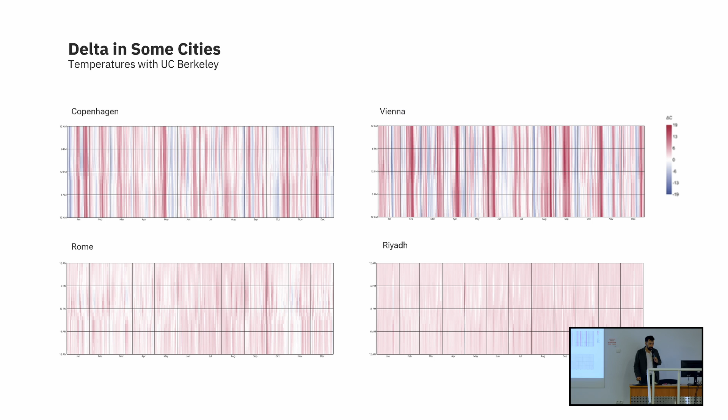When we begin to look at climate change for different cities, climate change is very differential in the sense that certain locations like Riyadh have about 6 degrees more flattened all over the year, whereas certain cities are characterized by frequent changes and frequent extremes. We are losing, in a way, the average condition that characterized these days.

These are differential. Each place is going to have extreme high changes, for instance in Riyadh, especially during nighttime, whereas in Rome, major changes happen in the central times of the day. So it's very important that we are able to understand how things are differentiating.

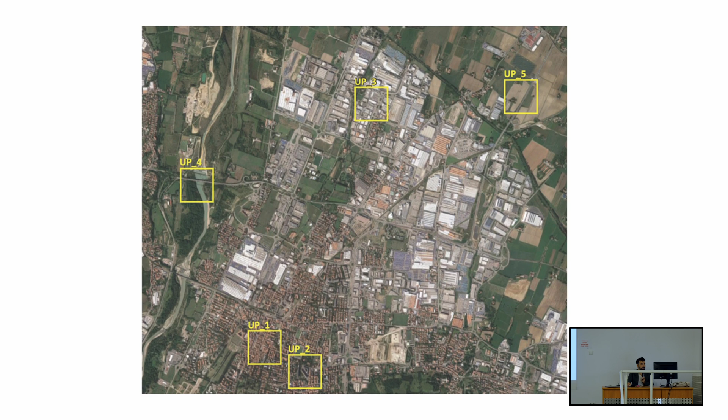I'll show a first example, which is the city of Maranello, where Ferrari is, just to understand what can be the local effect of climate change. This is a collaboration with the office of Mario Cucinella, with which I collaborate. So we did models to understand within the center of the city what will be the real feel in terms of temperature in 2050.

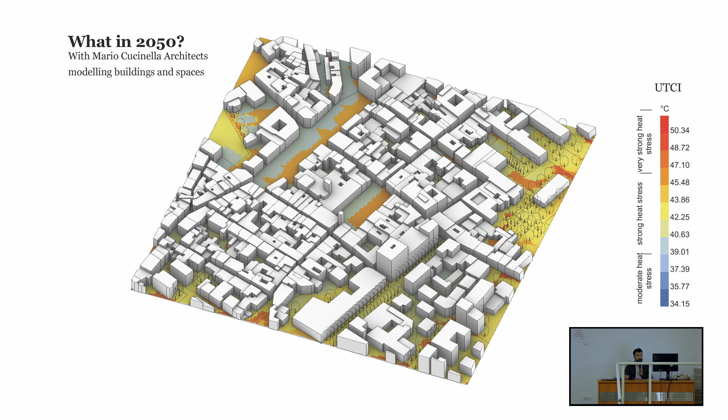We can see that in certain parts of the city, like this longer plaza, we have experienced temperatures of about 45 degrees. And also this is affecting...

...the energy consumption of buildings. And each building will have a higher temperature within the interior of a certain number of degrees. And we can see that certain buildings have almost no changes in their temperature, whereas others have. Let's just keep this in mind.

When we go to the natural site, very interestingly, there are certain features that actually stay at stable temperature, like you would obviously think.

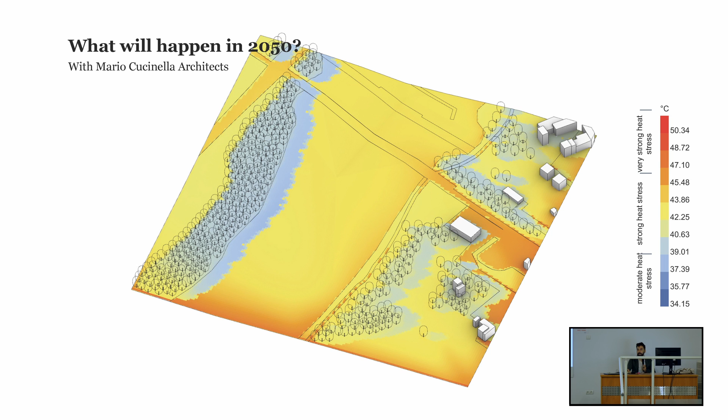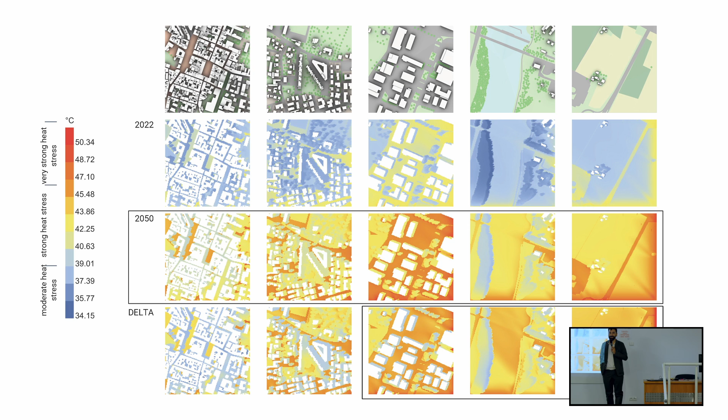And this is an industrial site. I wanted to pay attention to this: are you aware of the topic of urban heat island? Have you heard of cities warming up? Yes, do you believe in urban heat island?

Okay, I don't. And I will explain why. So this is the historical center, and these are the surroundings. These are the changes in temperature.

You can see lighter colors here, lower temperature. And here you can see higher temperature in the agricultural site and in the natural site, with forests and rivers and so on. Higher temperatures are experienced in the future in the surroundings of the city than in the center. This is a bit of new information for you, I guess.

This is due to the fact that when there is vegetation, actual vegetation is not capable of adapting to future temperature. So trees, according to this model, are each modeled according to their resistance to radiation and temperature. What we have is that agricultural crops and paths, as well as natural systems, are actually getting even warmer than the city center.

But anyway, a certain fabric, a certain distance between the buildings, a certain mass, especially during the day, is able to reduce temperature. What is happening is that a tree dries or dies, leading to higher temperature. Same happens for grass: when it changes its fibers and becomes dry, it actually accumulates heat rather than reflecting it. So all these factors are quite important.

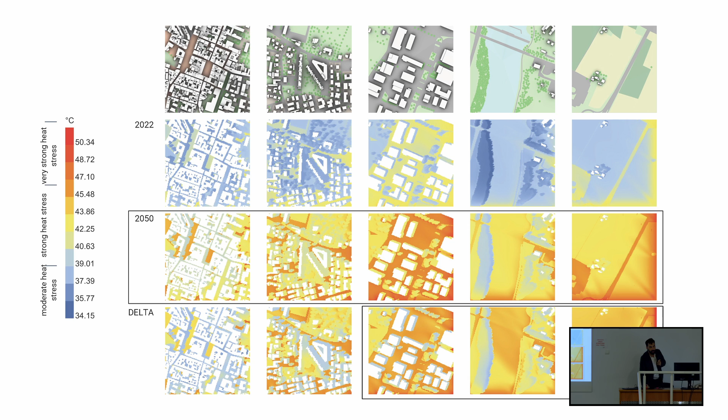Okay, so what can we do? The implications are quite high. So we use these models, and then we did some parametric correlation that helps us see how, over this timeline, hydraulic flow is highly reducing with this temperature trend.

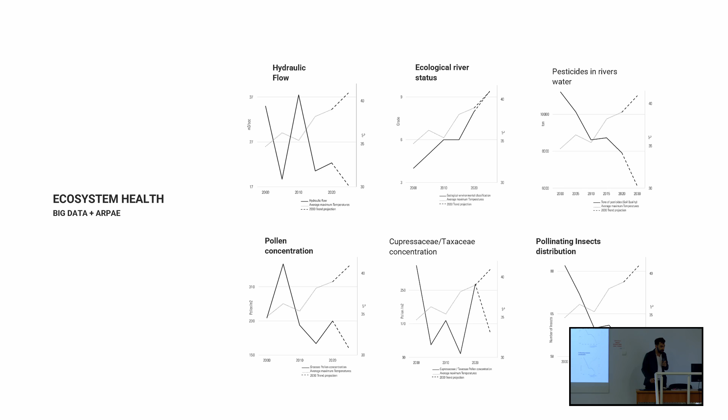Ecological river status is decaying, as well as there being a big decay in the number of pollen concentrations. And there is a desynchronization between bees, butterflies, and other pollinators and the trees, an alteration of timing that is actually catastrophic for the natural ecosystem.

But also, when temperature increases, pollutants in the air, despite the electrification of vehicles, are catalyzed. So for each degree of higher temperature, the effect of particles of different sizes increases a lot.

And obviously, because of climate change, there is more radiation from the sun, and this impacts skin cancer. There is a huge number of cases across all of Europe and also in this district.

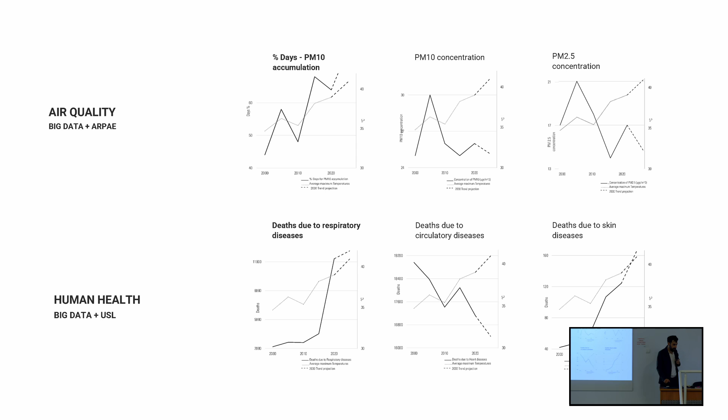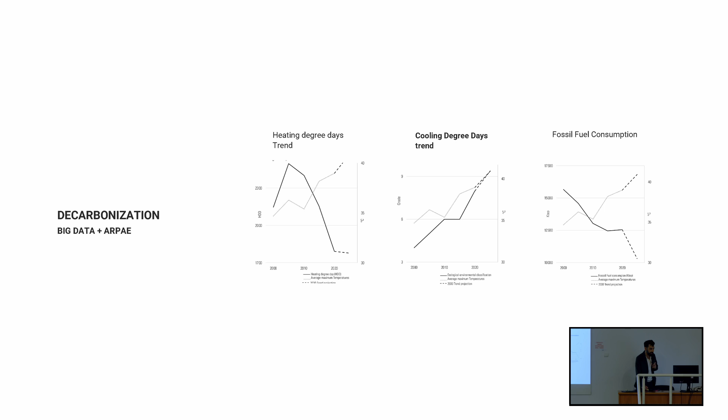So even a few degrees means a lot, and obviously there are consequences for buildings as most of the energy costs are shifting from winter to summer. So these are quite big numbers to take into consideration.

Up to now we have lived by the paradigm of sustainable design, which says don't do any action that compromises the environment or health. It's a law; sustainability is a law of conservation of the status quo we already have.

The question is this: okay, considering the degeneration we've been speaking about, is it enough to be sustainable? Sustainability means actually to conserve the current situation, or do we need to do something to regenerate the context? And this is the quality of planetary health, or local health, we can say.

So as the quality of ecology and health decays, probably we cannot afford any longer to be just sustainable and have minimum impact or no impact. We have to have a positive impact on the context.

And here comes the definition of regenerative design, which is about having a plus in several categories. I will tell you a bit more about that.

So probably we can use many of the available systems. What we've been using the most in Copenhagen is the planetary boundaries. It is actually like a cake, where each slice refers to one of the elements of health for the environment. Some refer to water, some to air, some to ground, some to species.

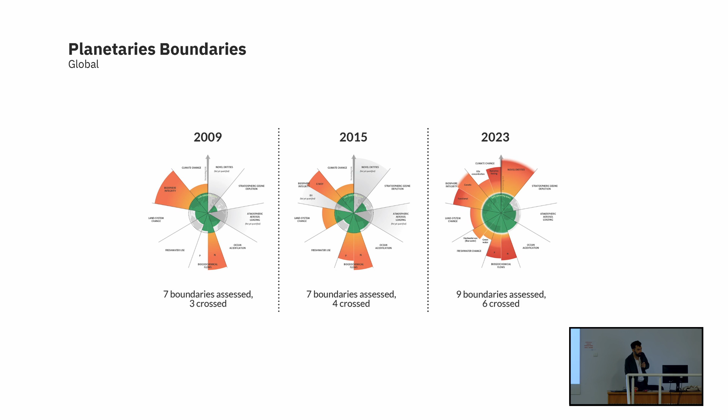In a very short time, most of these boundaries, which is the limit above which there is no possibility of reverse condition, have been exceeded. So the question is, what can we do as architects or planners for this?

When it comes to the first category of the planetary boundary, climate change, we can think of using the new temperature of the city as an opportunity. That will be one of the focuses of the lecture.

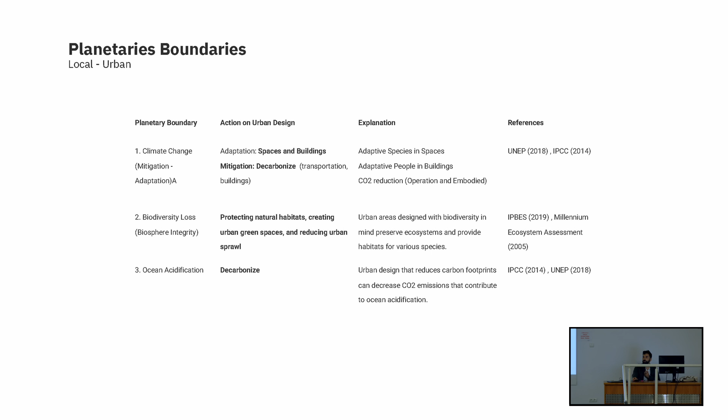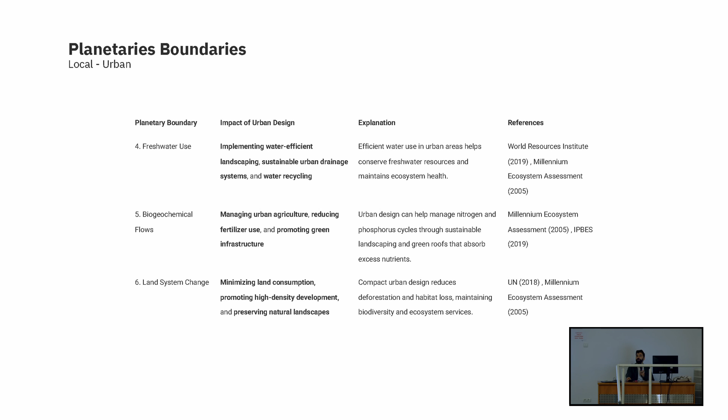This is quite straightforward. When it comes to fresh water, we have to think that the water that enters into the city has to go out with the same quality. I will probably leave you the lecture so you can go through some of this. But let me get back to one point.

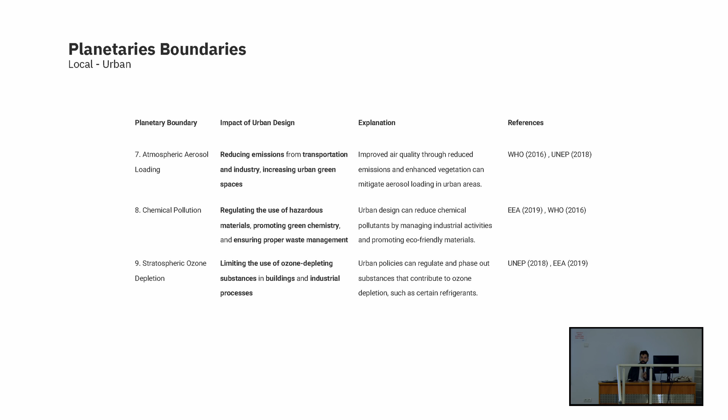When it comes to atmospheric aerosol, the different kinds of particles, we can probably try to understand what amount of vegetation we have to place into our context in order to absorb it.

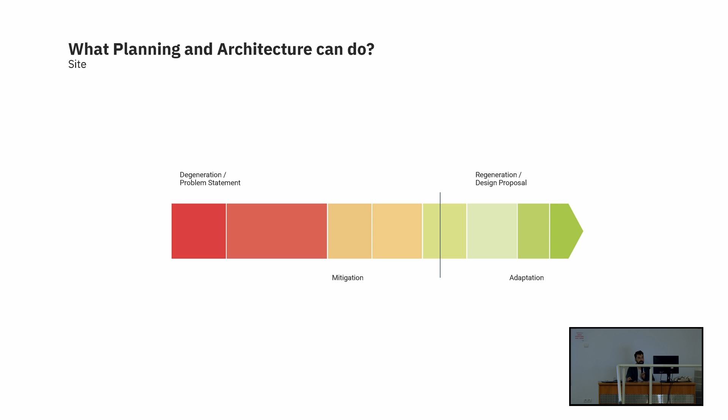So we said that we have to shift from a sustainable approach, which is about mitigating, to an active approach, which is about adapting. And here is the first project I'm going to show.

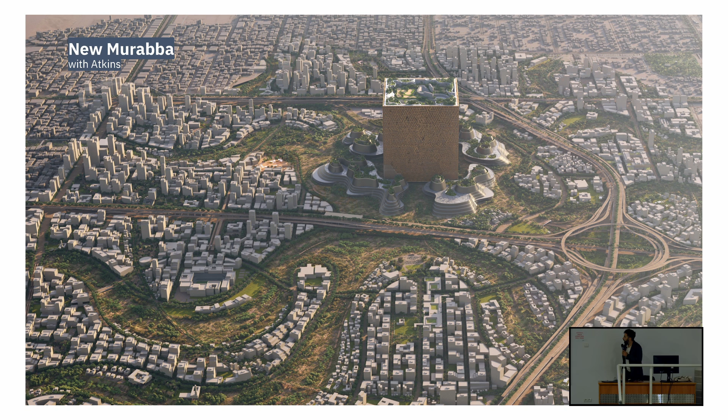This is actually one of the largest developments in the world happening now, in Riyadh. The idea is to create a new city, an extension of Riyadh, that compared to the other big project, the Neom, which everyone probably knows, tries to root much more into the design of ecological lines that are into the context.

So it all starts around dry rivers, called wadis in the Arabic context. The whole idea is to start, before building all the structures in this 20 square kilometer site, by creating the biodiversity system first, and then begin to construct the different neighborhoods.

This is quite controversial. As you can see, this is a skyscraper to give you the height - this is half kilometer by half kilometer by half kilometer. So it's going to be the largest building in the world, which is interesting because it casts a big shadow, which in a way keeps activating the context and creating an area which is protected.

But what are the challenges? Around here there are linear elements that each have a certain ecology within them, a certain protection, and this is supposed to be an area where all the streams coming from the different river banks and corridors turn around and create some turbulence.

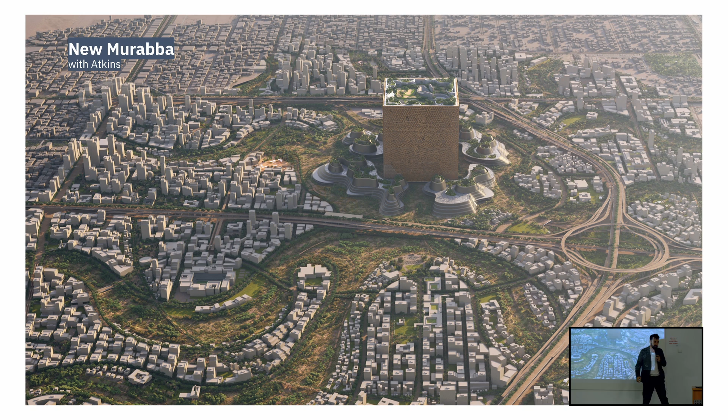This has to be supported with some simulation, and obviously you can understand how long it takes to do a thermodynamic simulation for 20 square kilometers with the tools you use in your course, like the Ladybug tools and so on.

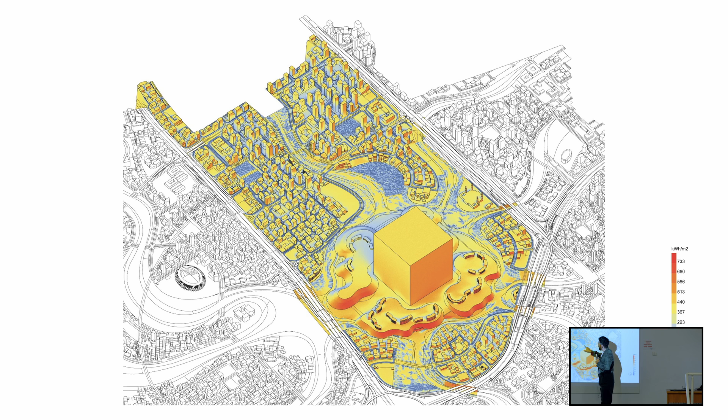This is actually a radiation map where we can see how it's possible to create pockets of different colors. For now, let's simplify the language - intentionally, around the wadis, there is an idea to create a zone of different temperature.

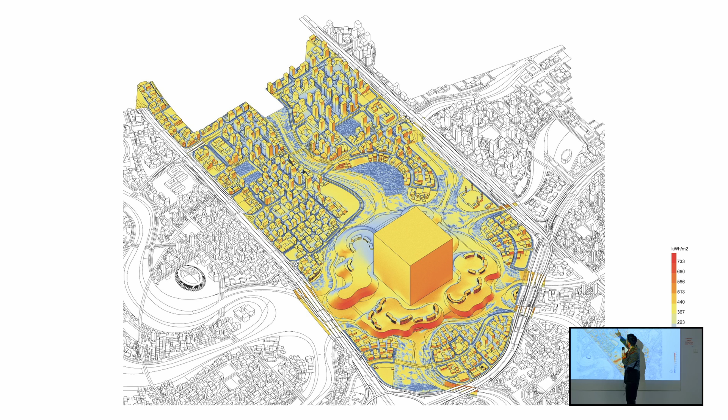So there is a certain flow and inner movement within the site, and there are other parts that are shaded. The idea is not to create a reduction of radiation all over the site, but to create areas where a heat flow will be generated in such a way.

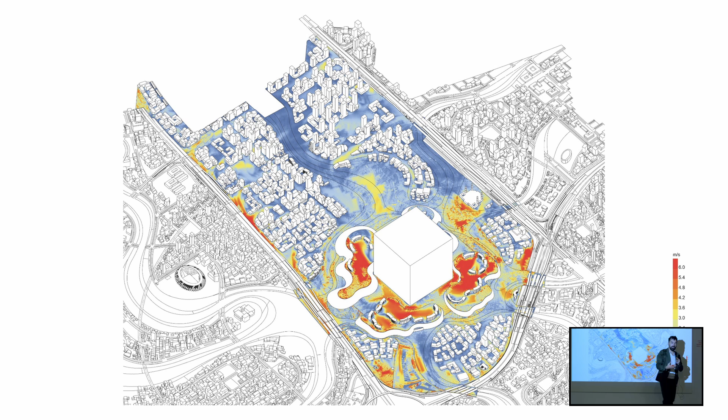So whereas this part seems to work, now we are working on all of these blocks, because despite the northern wind, at night it comes in this direction, and there is still not enough turbulence or movement. So there is actually work on cutting and carving some of these shapes that are then given to the various archistars for development. But it's several iterations where the climate has to be modeled for a large site.

But the idea is to play with reflective material, with misting systems, with a series of technologies to see what works and what doesn't work. It's a bit complicated because natural ventilation, for instance, doesn't work above 36 degrees.

Above 36 degrees, it's like pointing a hair dryer at yourself. So ventilation is not always a good feature. When air is higher than the temperature of the body, it's a problem. Misting systems are also problematic in certain conditions, as well as vegetation, which cannot sustain this type of temperature.

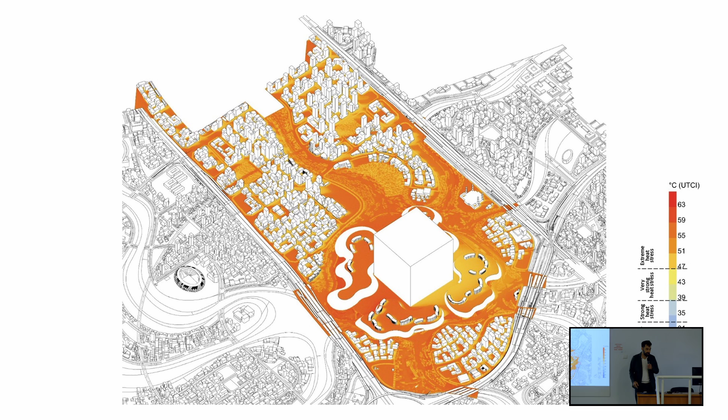So actually it's a very iterative process where you need a mix of several technologies to achieve a better situation, where probably even trees will need to be shaded themselves in order to survive within the context, and then the trees generate the comfort for people to stay. So we study the comfort of different species, trying to understand at what temperature and radiation they can survive.

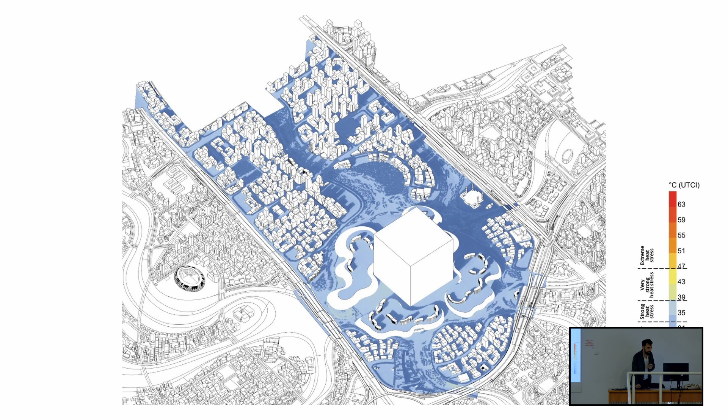This leads to several iterations over several months, where we have to design conditions primarily and surprisingly not for humans to stay, but for other species first. So it's a complete shift of paradigm where the first target, at least nominally, or at least in our work, is to create an environment for multiple types of species. The project is ongoing, so let's see where it gets.

This is for the city of Gothenburg. I will sit a little, just because I need to use the mouse more often, otherwise we'll stay until 10 o'clock.

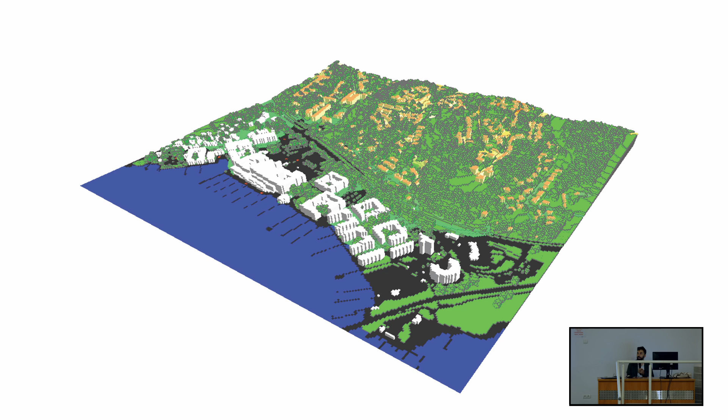Gothenburg is trying to expand, and there is high pressure to sacrifice some of the forests, especially in the suburbs. There's a new layer of buildings, and also several built in the 60s that are considered obsolete by the municipality, with higher density investment being considered. So the question we had is: what can we keep, and what can we get rid of?

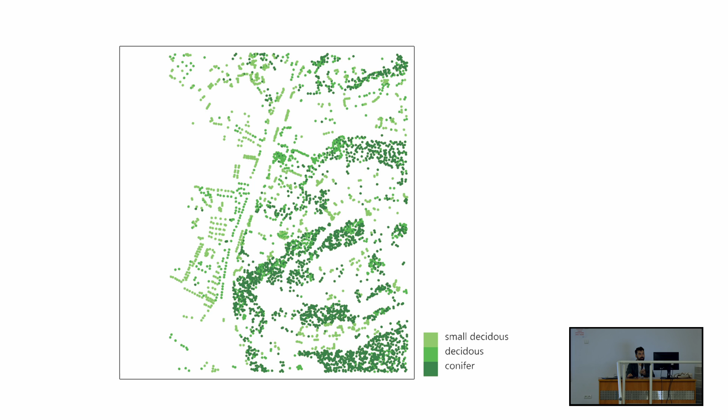So each type of tree, or at least the three primary families, were modeled, as well as the different building fabrics, shapes, and so on. This is the temperature at 2050 for the site, where we can see how certain areas get to 40 degrees up north, as well as certain buildings, at least during the day, reaching very high temperatures inside.

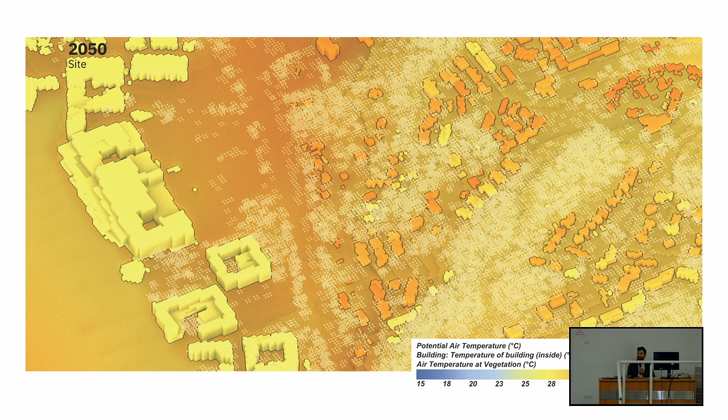Imagine a Swede living at 38 degrees, when already 26 degrees is quite a problem for someone from Scandinavia. So it's a big shift from 2018, when we recorded the data and calibrated the model, to what is projected for 2050.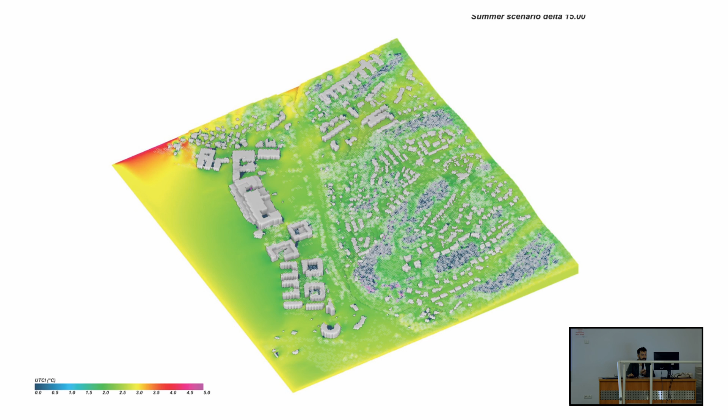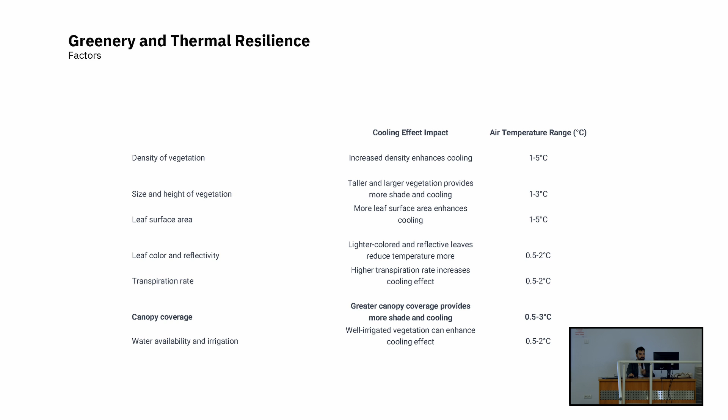And we could see a certain effect of lowering the temperature, both today and possibly into the future. You can consult this data later.

A building that is hyper-insulated, like the new offices they've built, has the same temperature day and night, with no mechanical system. It's so thick that there is no exchange with the outside.

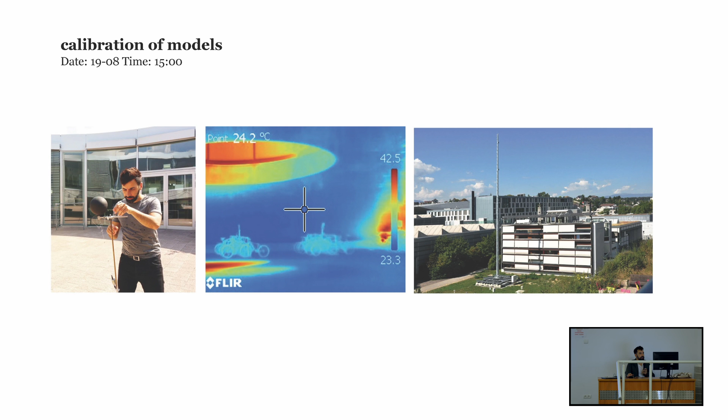Some other example—perhaps I'll skip this project, since it's a collaboration with Kengo Kuma's office. For some years I was at EPFL as a researcher, and we began to have communication with different architects to do a sort of post-occupancy evaluation of performance.

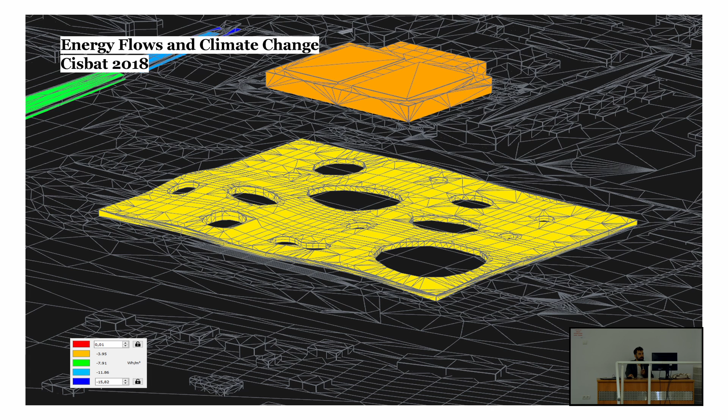These are the heat exchanges happening between the buildings and the context—these are energy flows. This was in construction back in the day, or in refinements we could call it. This was the Art and Science Museum at EPFL, and we did a thermal model of the full context, seeing which meshes or areas were going to have very high temperature surfaces. It's easy for a surface to get to 80 degrees in summer conditions, for instance.

We can see an interesting fact: this is the old campus of EPFL, where surface temperatures are much lower. Why? Because it actually has very poor insulation, and the cooling load—the cooling of the outside or the inside—also cools down the building surface. So there are interesting interactions between the interior and exterior that can be evaluated.

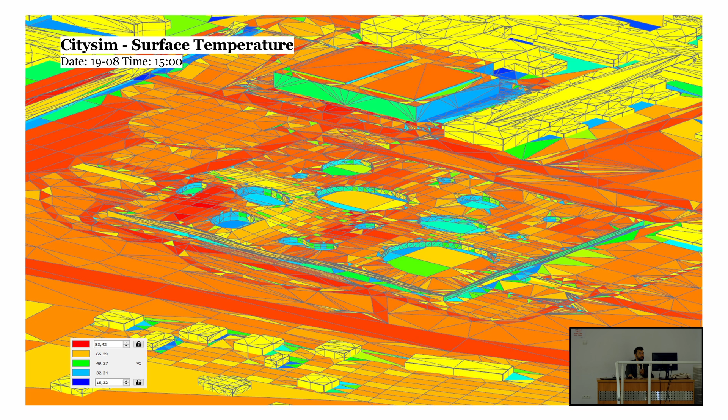Getting back on track, the overall scope was how we can grant the extension of the campus a certain acclimatization, with good outdoor comfort and a building that would provide a certain type of performance. We first understood, after the simulation—and this was quite decisive—that the outer landscape needed to be designed with much more permeability, filtration, and with a certain temperature.

Also, the building doesn't have a mechanical system, and as you can see, the skin is purely breathing—it almost looks like a honeycomb. According to the simulation, for different seasons this allows us to capitalize on the outside conditions.

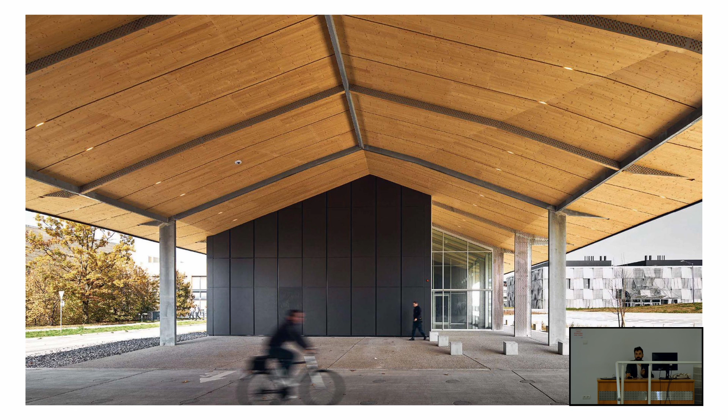But it was also necessary to protect it with a very major cantilever. So it was an interesting dialogue with the office of Kengo Kuma on how performance can match the language of the office. Primarily, two or three big openings for airflow were needed in order to cool down this part of the landscape.

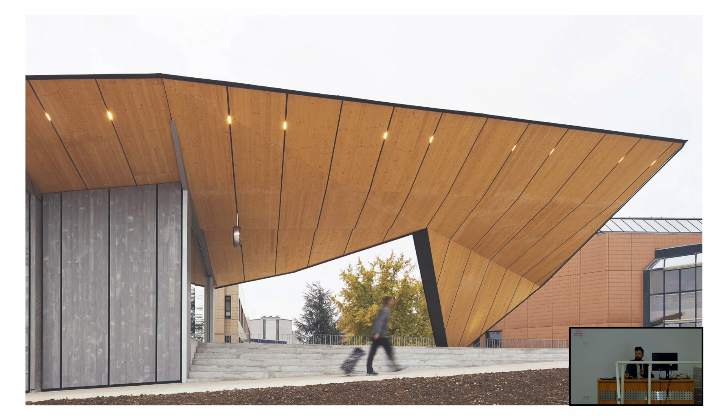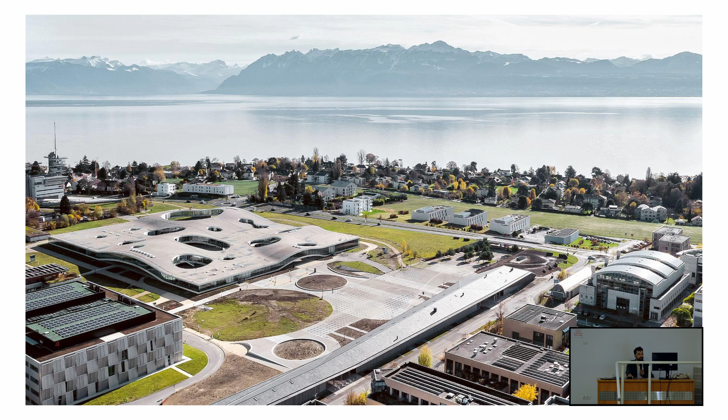We can see how all these parts were almost cut in order to promote ventilation and have some inlet of air within the campus, to cool down that red surface we saw earlier. This is the development where key passages are emphasized in order to have ventilation. Now if you visit there, you can see a prominent amount of vegetation.

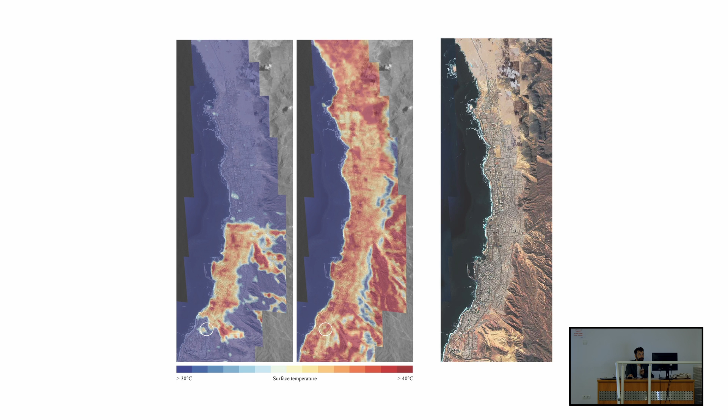But at a certain point we had a doubt: what if we are not working to control temperature, but instead play with temperature? So during an expedition in the Atacama Desert, and working on the city of Antofagasta, we tracked and placed sensors in several buildings as well as outside, getting an understanding of the thermal behavior across the year—of course, summer for them is a little bit chiller.

At the same time, we were in contact with Dr. Kramer, who back then didn't have this intuition yet. This is a paper he published this year, where he shows that for humans it's probably more convenient to live in buildings that are less acclimatized, that have different temperatures, with certain cold areas and certain warm areas. This is proven by several of his studies.

It's now understood that adaptation—shivering for cold, or sweating, or other mechanisms the body uses to adapt in places where we spend most of our hours—is a strong precursor of health. People who work and live in steady thermal environments with air conditioning in both seasons are more prone to chronic disease, as well as to develop diabetes and several other types of disease. So it was found out that it's better to make the body work.

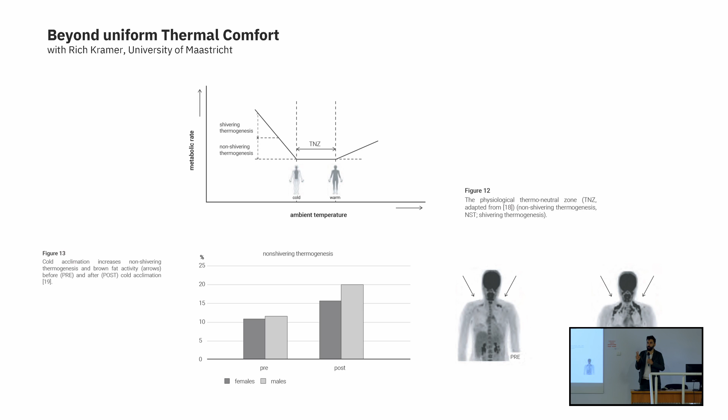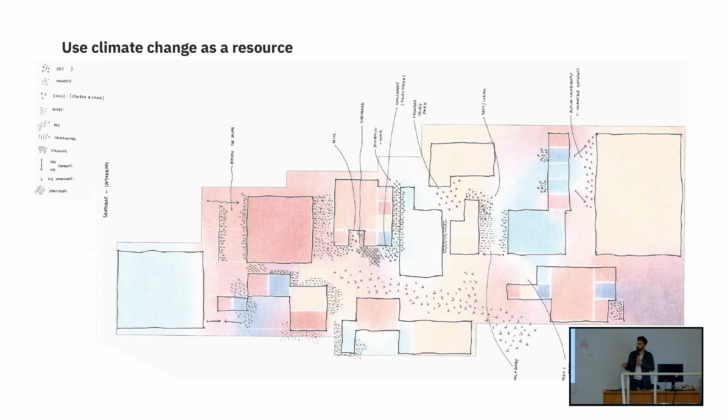So we begin to think in some master planning for the city of Antofagasta for certain key areas. What if we accept that there are areas that are overheated and some that are cooler, and we begin to think of activity that moves through a landscape of thermal environments? Rather than create the cool or the warm city, we want to choose the right species, both fauna and vegetation, that can adapt to the different phases.

This was then supported, especially for one building, with simulation, in order to capitalize on and even increase this differentiation, so that depending on the time of day, you can move through the building, and the species and animals can really enjoy this changing element.

This concept was brought into a consultancy for our friend Mario, where there's a landscape of different temperatures at different heights, but primarily these boxes are not acclimatized. This is an office building. Depending on the time of day, you get into boxes with different temperatures for open space work or socializing, and you can navigate and experience different temperatures—some overheated, some cooled down.

It's also interesting to bring down the level of temperature. Just talking about the summer scenario, having a forest according to the prevailing wind, and having one of the few suspended buildings in Milan, air compresses and accelerates, making it possible to create a microclimate.

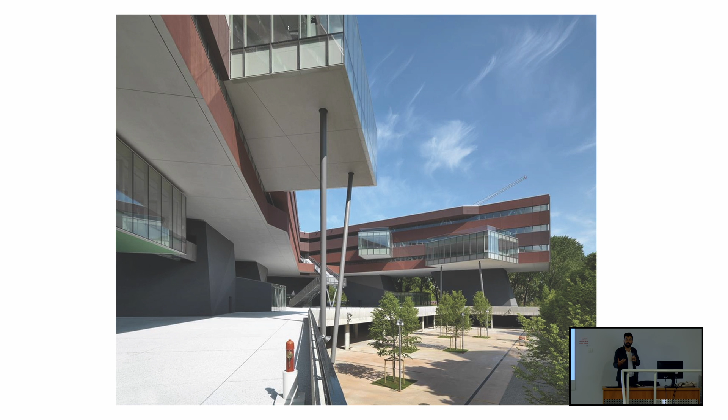Furthermore, in summer—do you remember the sun angles we discussed at the beginning of the presentation? In summer, in winter, these black blocks are activated, so they can reach 60 degrees. They only get heat during winter, and then create a certain microclimate around them. So it's possible to have this climatic solution that determines, or at least increases, the usability of the outdoor space and the quality of the thermal experience within the interior.

Some years ago, we won this competition with Cino Zucchi for the Lavazza headquarters, and we tried to bring this concept of thermal variation into every window of the building. Each is a spandrel with different colors, each receiving and absorbing a certain radiation, with panels of different insulation—so if you touch them from the inside, you'll feel a different temperature. There are also trombe walls and double skin facades within it.

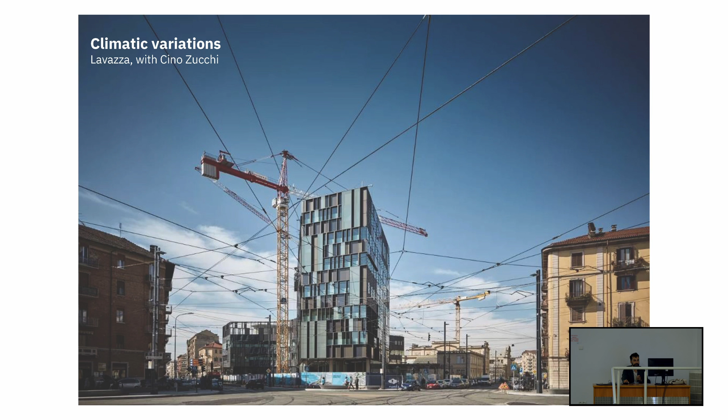It's part of an overall concept of regenerative design, where there are also matters of water, creating an ecosystem with different temperatures for the site, and a composite solar envelope so as not to compromise the context's right to light. But perhaps I'll talk about this aspect in another project.

In general, we can see how back in the day this discourse about fluvial and pluvial water management in the city wasn't so developed. But the overall idea for the context is to create different temperatures, as well as other ways to accumulate or absorb water, keeping water on the site—especially in certain seasons, which can really create a certain microclimate.

Working on the simulation—this is the mechanical engineer's dream—where energy is flat, each facade has a certain radiation. The project started like that, with a dialogue with the mechanical engineer, who would say, okay, here we use this facade when it's red, and when it's yellow we use another facade. But they didn't know I was going to create chaos.

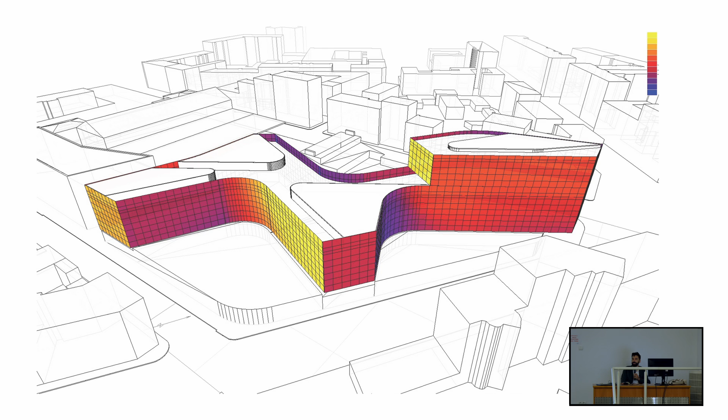Because the idea we developed with Cino Zucchi was: what if we alter, within the same facade, the amount of energy that enters and exits? What if the flows are modified so much that depending on where you are in the office, you have a different experience—which is about thermal comfort, but also about daylighting?

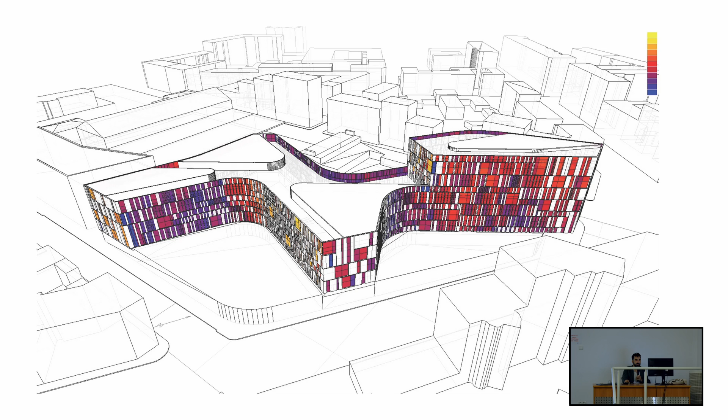So these are some of the final effects. Unfortunately, I don't have any data because they didn't allow any post-occupancy evaluation, but I still have some hope. The idea is that people would relate to the facade and to the different conditions, also creating a landscape within the interior which is not rigorous, but has a certain fluctuation of people within the context.

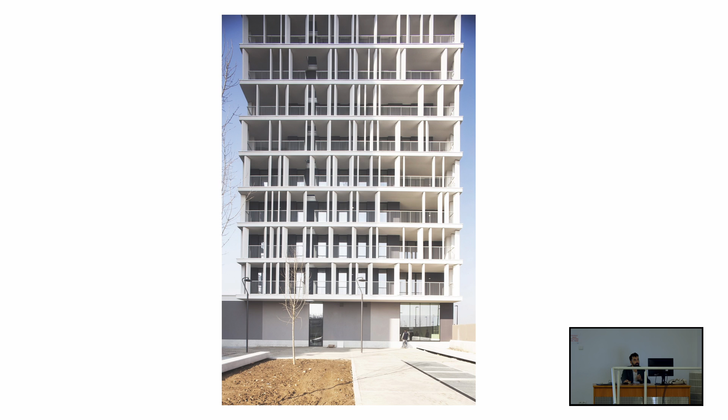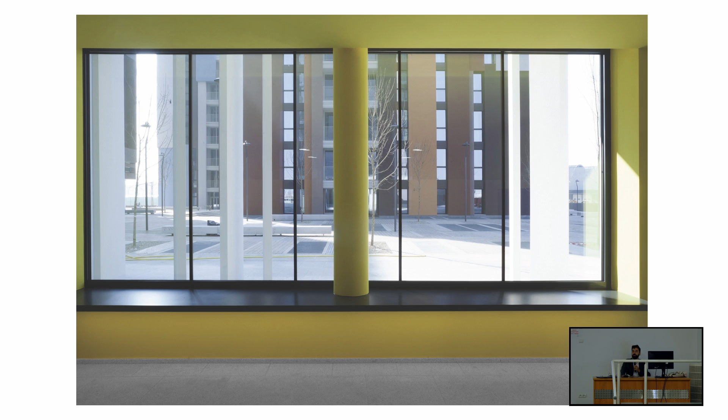Same for this facade in Milan, where the composite is done but with shading elements that randomly or semi-randomly don't have the pure function of shading certain incoming energy, but the idea is to partly reflect, partly absorb, partly minimize. As an example, I took this picture of a place that in this moment is not even exposed to light, so it's completely cast in shadow, but due to the reflection of these panels, light is cast in, and you can see how certain light can be cast into this direction.

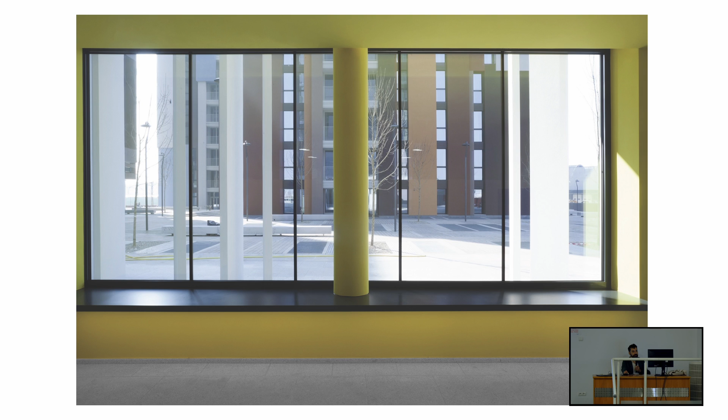So when light comes into a space, it creates different conditions of daylighting, but also of temperature, because light comes with a certain amount of short wave, which comes with heat. So we did some recording on this black panel, recording very different temperature, even when it is shaded. Imagine when it's not in that state.

This is the northern facade, where there is a color code for the insulation. Each of these has a different thickness of insulation. Your question is, okay, but there is a regulation you have to respect. So the trick is to provide only the average insulation — you have to reach the average insulation by law, but this is the way around it. Depending on where you are in your unit, you can have this differentiated type of behavior. Same for the outside — clearly some panels outdoors get warmer in winter or overheat in summer, but it creates a landscape that we believe represents the diversity of temperature found in nature.

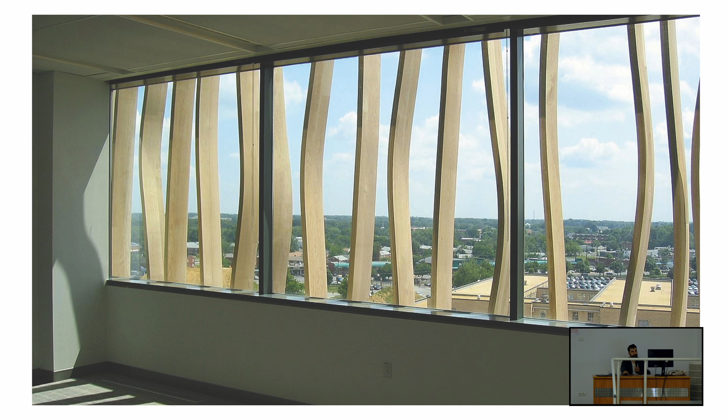Similar concept applied to other consultancies. This is for the Census Bureau in Maryland, where there is a randomized pattern of shading system for offices with a density that varies, so it's possible to create different incoming energy, and this frame changes from office to office. This is also true for a hotel in Hyderabad, a consultancy for SOM, where we actually engineered the facade to respond to the position of thermal receptors within the body.

We know that cold or warm are perceived differently — we have more warm receptors in the chest because we have to protect certain organs. We have cold and warm receptors in the ankles, the wrists, as well as a certain amount in the head.

So the idea is to create a facade that keeps changing so that you have this different type of articulation of sensation depending on where you are in the space, and this was then linked to an algorithm to generate it. Also, it's not all about the body strip, but about the perforation level that changes from side to side, and the temperature that can be gained from different exposures.

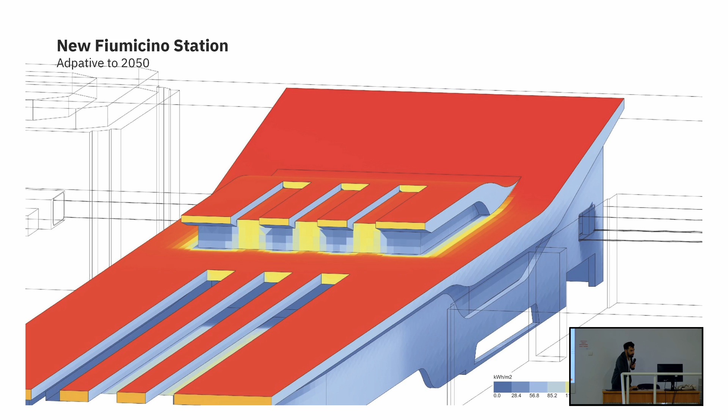More recently, I'm collaborating with the Italian train station company, specifically on perhaps 7 or 8 stations. The objective is to have full comfort in 2050 without the use of mechanical systems. So there is a new rule that says that, despite the boundary of climate change, this has to happen and work without mechanical ventilation.

So we tried to analyze temperature and wind patterns for 2050, and we tried to model the building to reach as low a temperature as possible and have good comfort within it, but it was impossible. So we needed to increase definitely the factors once we had already shaved solar radiation and the envelope was optimized. The overall concept was, let's try to make a building that works like a Formula 1 car in a way.

It's able to take air from its longitudinal axis, but also from the side. We began to relate the station position to how airplanes work when they arrive in Fiumicino in Rome. We noticed that depending on the wind, the control tower tells the pilot whether to land in this direction or that direction. So wind becomes quite an interesting factor, of course, like in many areas close to the sea.

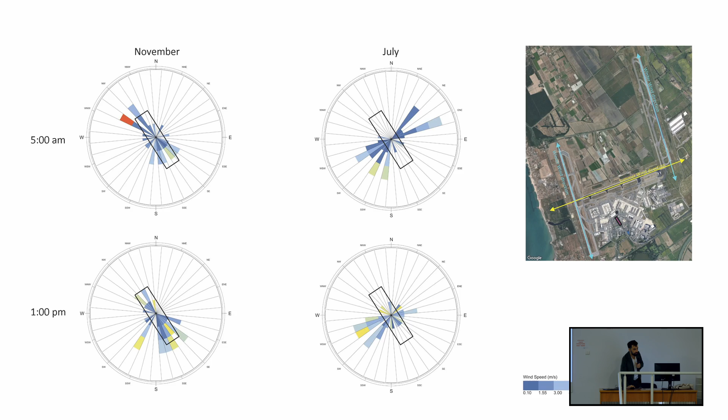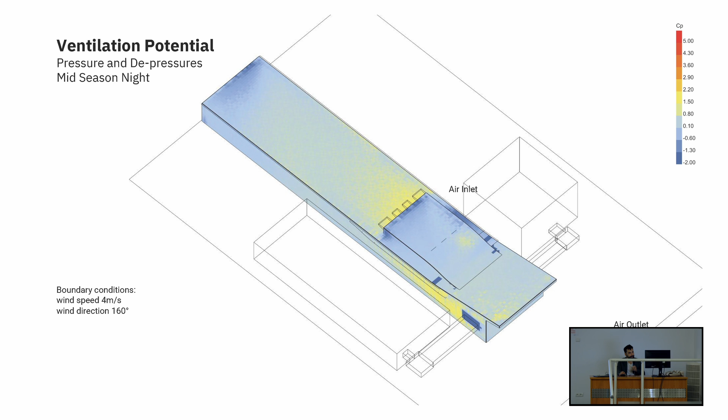So we did different tests with computational fluid dynamics simulation, also with some wind tunnel testing, but I didn't put it here because we had some problems. In general, air enters and gets out in this direction, or the opposite. We can see the air inlet and how it works — it has 2 air inlets, but depending on the time of day, it works with different directionality.

And then at summer night, when wind is transversal to the body, it enters from the side. There is no automation, so the building is always open, and there is enough pressure to keep the 2 directions working without any type of automation.

We also tried to optimize this system with certain strips, warming up this part, because we know that when certain bodies warm up, it attracts air. This is the last scenario we are studying, when air is fully stuck and there is no movement.

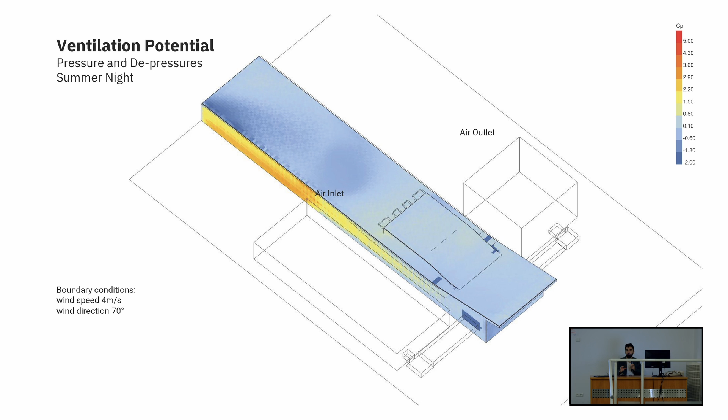But in general, if we look at the inside, what you want for a good building is areas where comfort may change. It doesn't matter if certain areas are at very high temperature, but it's important that there are chillier areas and slightly warmer areas, so there is differentiation. When there is this differentiation, there is also autonomous flow within the interior, and people can have this nice feeling of being in a space that is thermally vibrant, where there is variation of condition.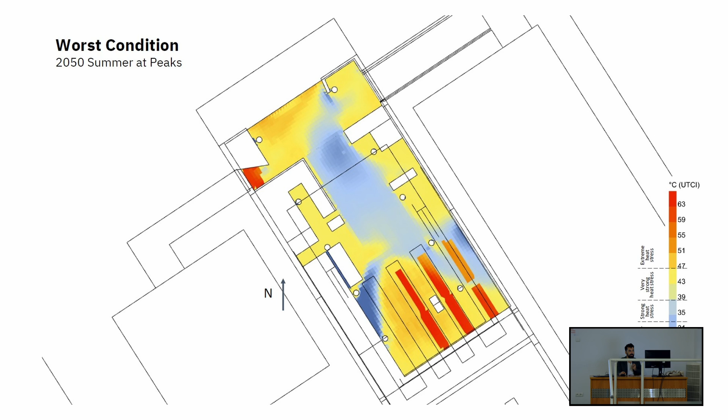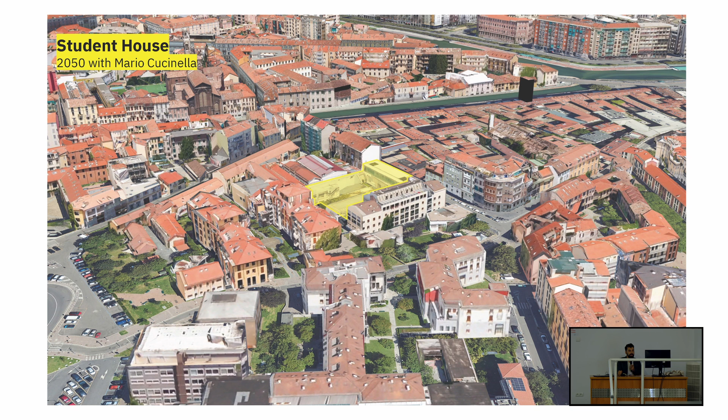More recently, we are working on a student house in Milan, a big issue. I saw a beautiful student house in Cracow, by the way, of new construction. I was very impressed. In Italy, this is not possible at the moment, but now there has been a lot of protest from students to have a place to stay, especially in a city like Milan, where rents are very high.

Just to open up a thinking on key performance indicators, on how to develop the massing on top of what is architectural intuition, regulation, and what a building form can offer to the context, we developed 10 scripts in Grasshopper with 10 key performance indicators.

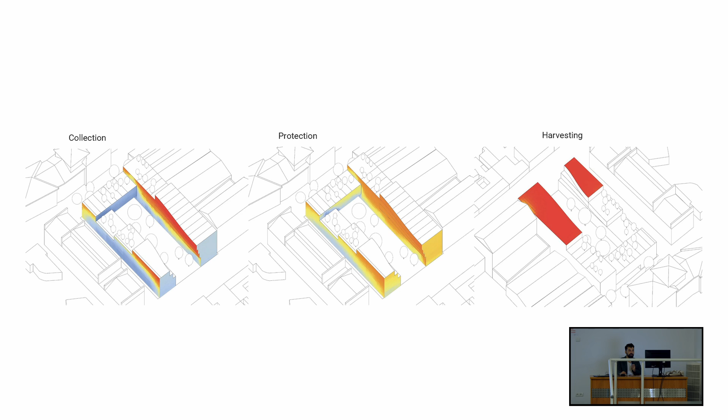Some are more classical, related to how changing the massing you can harvest energy or reject energy. But we wanted to bring in elements for the building, the user, and the city, like what are the best surfaces into a building to have green walls, and what are the best surfaces, actually, for butterfly and bee optimal locations.

Where vegetation should thrive, so each color corresponds to parts of the building. And this comes almost forced from the simulation for human comfort or other factors that contribute to the massing, such as connectedness to nature—the view factor of nature, which is purely a geometrical calculation.

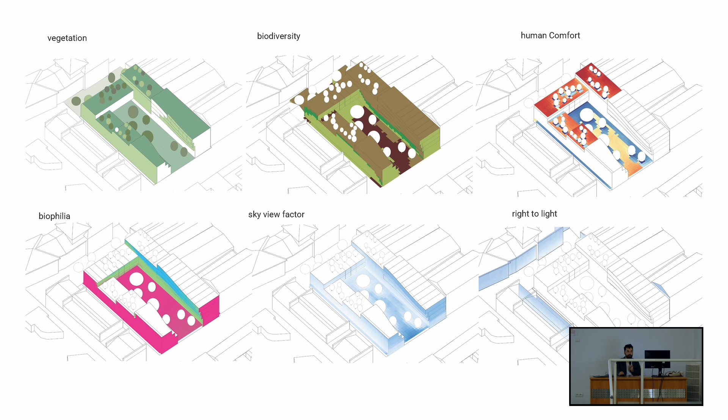Sky view factor, how much of the sky can be seen from the site and from the buildings, or right to light—developing something that allows the context to receive certain light. So each of these factors comes from several massing options; perhaps there are 10 massing variants that are confronted.

For instance, here we can see for vegetation stress that vegetation needs a certain amount for photosynthetic activation. But when radiation and temperature are too high, there is an issue because species cannot survive climate change, as said before. So we can see all in brown the parts where, if vegetation is placed, it will die for sure—there is no future for vegetation unless further shading systems are put into place.

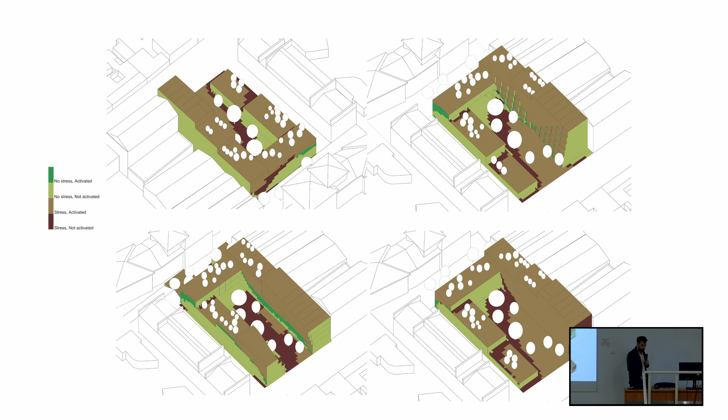So these are very simple ways, again, a comparison with different proposals until a certain balance between architectural intention and composition of performance is reached. Just to show a little bit the process of an ongoing work.

But it's very important also to do on-site measurements. These are some work with students in Copenhagen and in the Faroe Islands, especially because at that time we were asked to consult on the new educational building in the Faroe Islands, where part of our effort was on the optimization of energy performance and daylighting.

So we worked with the shape, with different iterations from the design team. But primarily, what we wanted to bring as a performance for the future, in an environment which is extremely cold, is protection from wind. And what is happening with climate change is that grounds, water, and streams will have very different temperatures according to the regional model than today. So a critical issue is how we can create areas that are always protected.

So this almost overlaps with the wind roses for 2050. And if you listen to Bjarke Ingels' narrative, of course he focuses on many other factors and his original ideas, but whenever and wherever the wind comes from, there are always areas that are protected. This links a bit to the concept of regenerative design, which is about increasing the quality of conditions also for the surrounding context, increasing livability—this net plus, possible to grant for each of the projects.

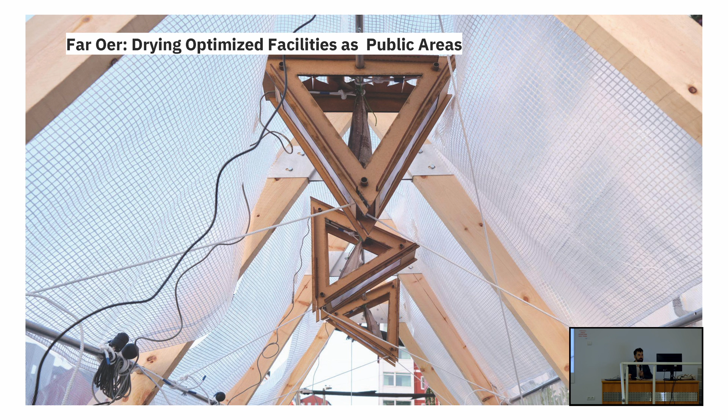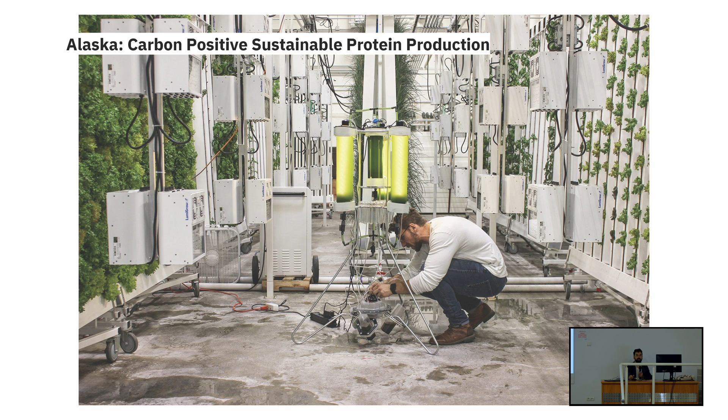And perhaps I'll show some of the works done with the students in the Master of Architecture and Extreme Environments in Copenhagen.

Magnus, the student, developed a system made of several panels. The production happens in a couple of months after a research phase in Copenhagen in September. He found an abundance of clay within the urban fabric, but also an excess of CO2.

Imagine that the level of CO2 in the city can get to 1,500 ppm. Above 800, you already begin to experience headaches - just to give you an idea. In this room, the longer we stay, the more CO2 is increasing. But in the city it's a dramatic problem, and it's important to understand how to use CO2 as an opportunity, for instance to enhance the growth of vegetables.

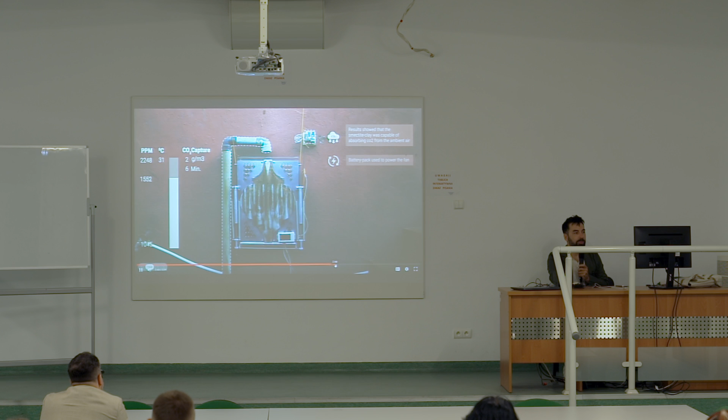So all the study is conducted - and perhaps I'll speed up the process - on how panels exposed or non-exposed to CO2 can lead to the growth of tomatoes within them, capitalizing on the water released from mechanical systems like this. So all the externalities that are negatively impacting the city are then used as a resource for this type of development.

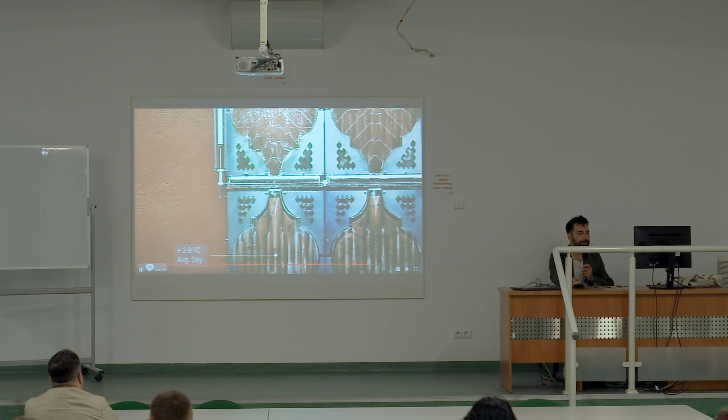And this is also like a mapping of different CO2 opportunities within the city, where different growth is happening. The experiment becomes quite architectural and scientific at the same time. Let's see if I can scroll to the next.

Also for this one, it's a pity - this is in Chile, where Harry developed a system about water, lack of water, and lack of electricity for many of the favelas in Chile. It's about creating informal elements that can be plugged into the houses and be understood by local people.

So sound is not working, but I will get to it - it was also interesting, the whole system and the mechanics, but without words it's a little complicated. This system, which really works in a banal way, was then finally even copyrighted because it allows enough electricity for a TV and to provide light the full night, while also providing clean water at any time.

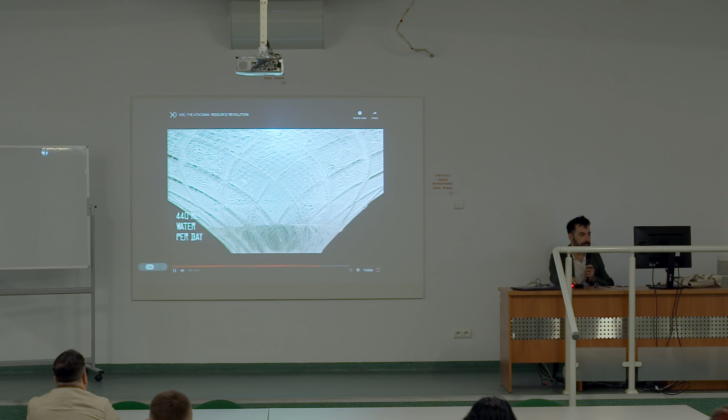So depending on the size, the nice thing is that it can be implanted into many different roofs, answering current issues.

I think perhaps I don't have another presentation here, but it would be nice if we can have a small debate, or if you have any considerations or questions, to have a small debate. Stay in contact on Instagram for climatic works.

But perhaps I will ask you: what is your approach to climate change in your project? Are you considering it? Did you imagine the implications of even a few degrees of change?

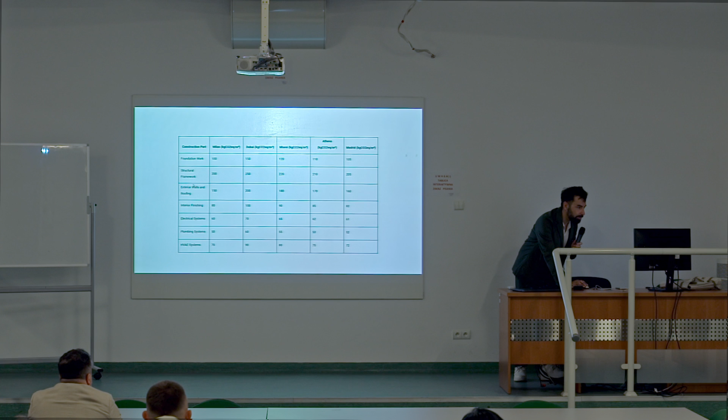But to get to a good value, what we need to have - and these are averages for other areas - let's see if I have the slide. So if we use certain building assets, it's possible to have certain construction, even for industrial sites, that during construction are carbon negative. They attract and absorb and stock more carbon than what's used for the making. All this can be combined in order to get to this minus. It's quite utopistic in these days.

Let's see if I have the... okay, now I have a small question, let's see if I found it. Just for the newcomer, the lecture is finished, but these are further discussion. No, just an extra discussion, but we spoke before. It's just to... no, you can stay. Obviously.

What is the carbon absorption of one tree? I'll hide it, otherwise you'll read it. You remember that you have an emission of 10 tons of CO2 per year, and that to build 1 square meter it emits about 200 kilograms of CO2. What is the absorption of one tree outside? You emit 10 tons per year through your life. What do you think a tree can do? How much CO2 can it be absorbing?

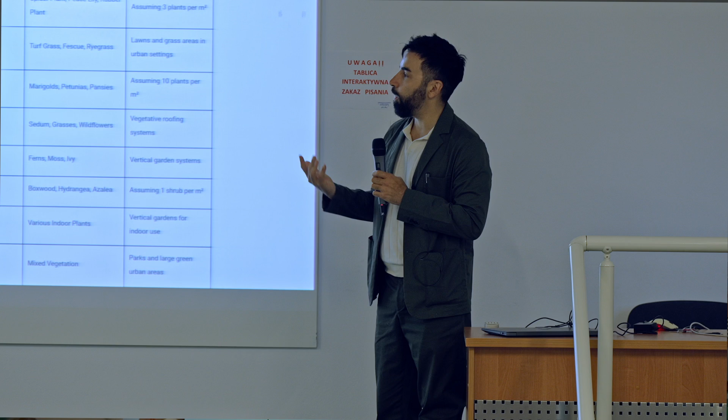But if we begin to compare how much we spend, the cost of CO2 for construction and the trees - I was very shocked when I began to study all this data into detail 2-3 years ago, and talked to people that do all these studies.

But when we have to plan the city of tomorrow, the key savings are not so much through trees or through a lot of vegetation, and it's not so much about the building - it's about the people. So people's lifestyle, like doing the 15-minute city, or compact movement - most personal CO2 emissions are due to transportation, our diet, and for instance the efficiency of our houses, which is anyway related. But it's very interesting that there's a lot in creating a space which is able to induce a certain lifestyle or a certain possibility.

So perhaps I'll try to improvise this further discussion to fill the time, because I finished too early the other presentation. But something to think about.

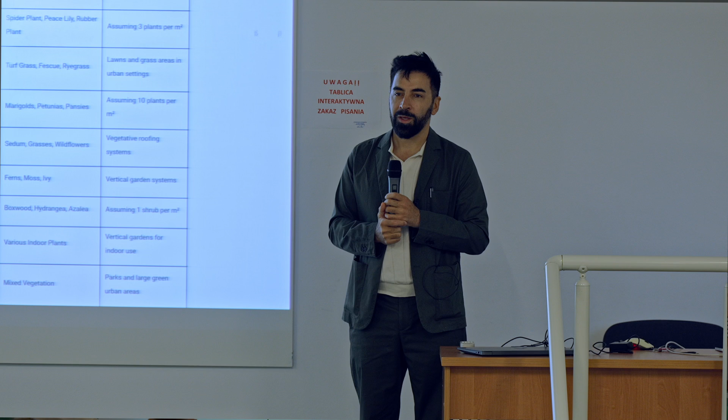When I began to see all these projects with a lot of vegetation, there are several benefits, but it's very important that we use these tables, which are very simple, to put some numbers about CO2 when we think about carbon. That's why I believe it's important to incorporate some metrics in our works, in our projects. Clients are asking more and more for evidence-based types of projects, right? It comes very easy for interior design, because it's a simple multiplication of materials' CO2 impact by volumes, but for the city, of course, it's much more dynamic, yet something not too difficult to measure today.

Okay, I think that was it, perhaps. Any question, perhaps? Yeah.